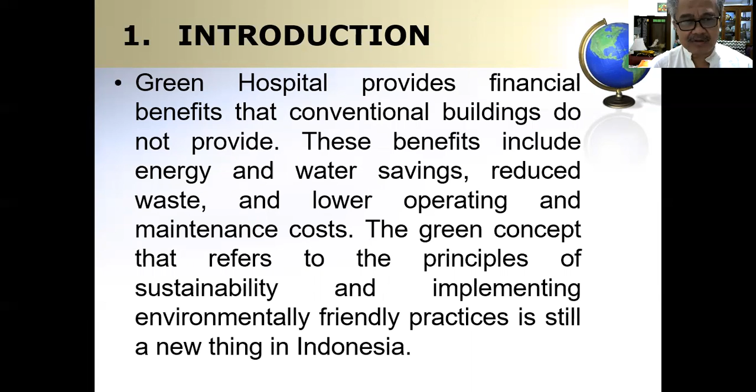The construction of the Bhayangkara Sartika Asih Hospital needs to be reviewed and evaluated so that it can be seen to what extent the green hospital has been implemented, especially in the aspects of location and landscape. The purpose of writing this article is to assess the implementation of green hospitals and provide technical recommendation for the Bhayangkara Sartika Asih Hospital.

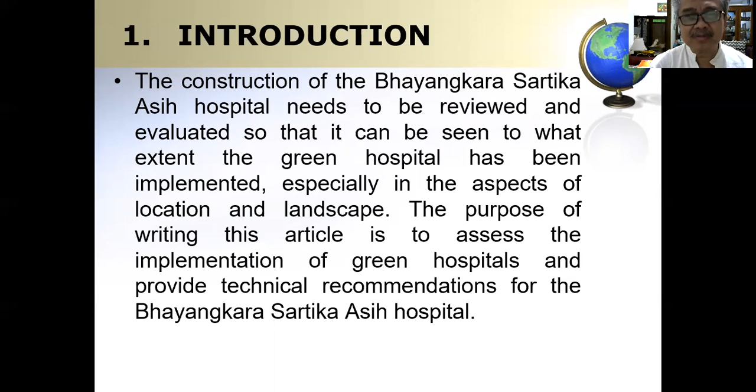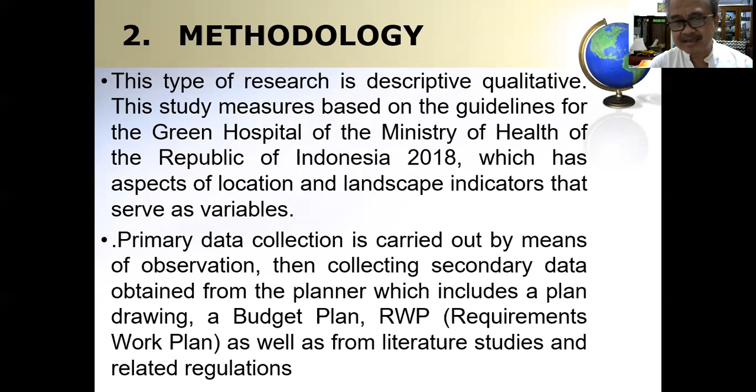Methodology. This type of research is descriptive qualitative. The study measures based on the guidelines for the green hospital of the Ministry of Health of the Republic of Indonesia 2018, which has aspect of location and landscape indicators that serve as variables. Primary data collection is carried out by means of observation, then collecting secondary data obtained from the planner, which includes a plan drawing, a budget plan, RWP, requirements work plan, as well as from literature studies and related regulations. The study area describes Bhayangkara Sartika Asih Hospital. Parameter, percentage of green hospital implementation on location and landscape indicators.

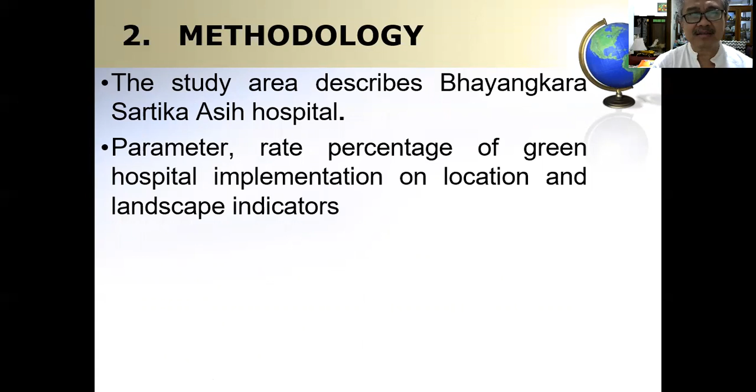Study area. The research location is located at Jalan Raya Muhammad Toha, number 369, Ciseureuh, Regol District, Bandung City, West Java, 40256.

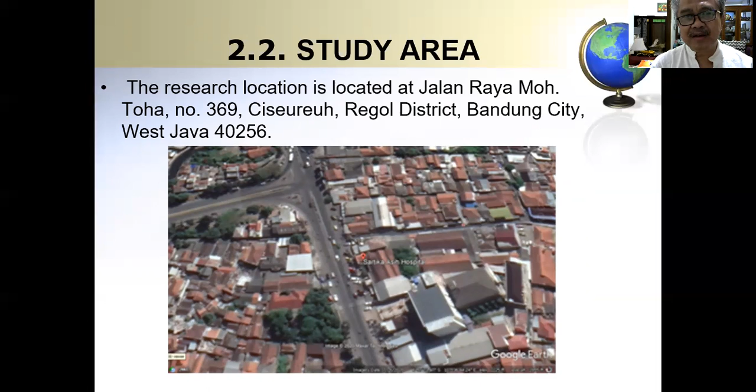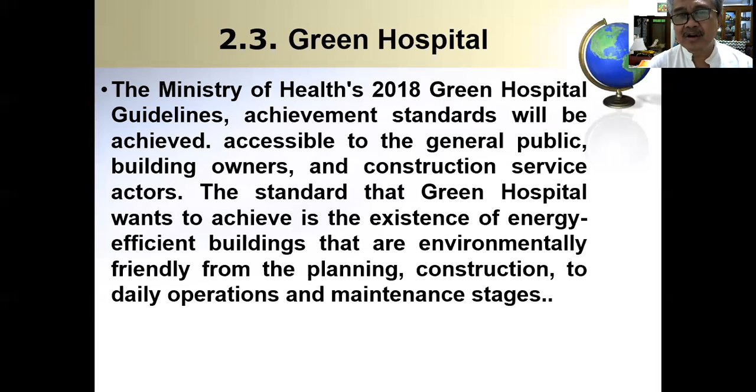2.3 Green Hospital. The Ministry of Health 2018 Green Hospital Guidelines achievement standards will be accessible to the general public, building owners, and construction service actors. The standard that Green Hospital wants to achieve is the existence of energy efficient buildings that are environmentally friendly from the planning, construction to daily operation and maintenance stages. Green Hospital of the Ministry of Health of the Republic of Indonesia 2018 has aspects of location and landscape indicators that serve as variables. Each existing category has criteria and benchmarks that serve as point assessment of the condition of the building.

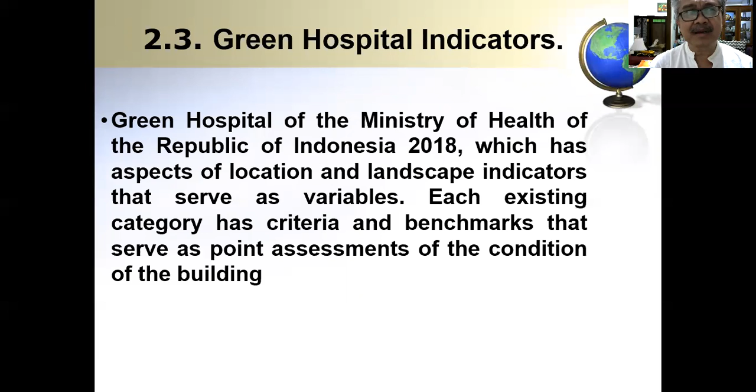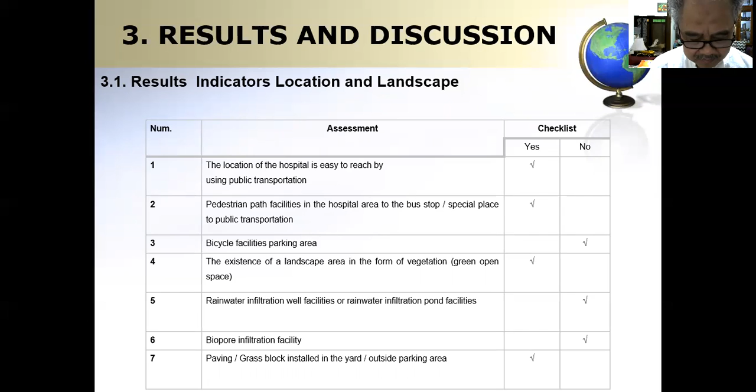In the checklist, yes. 5, rainwater infiltration well facilities or rainwater infiltration pond facilities. In the checklist, no. And 6, biopore infiltration facility. In the checklist, no. 7, paving or grass block installed in the yard or outside parking areas. In the checklist, yes. And the percentage of green hospital implementation on location and landscape indicators is total implementation indicators divided by green hospital indicators, 4 divided by 7 times 100%, and then we get 57.14%.

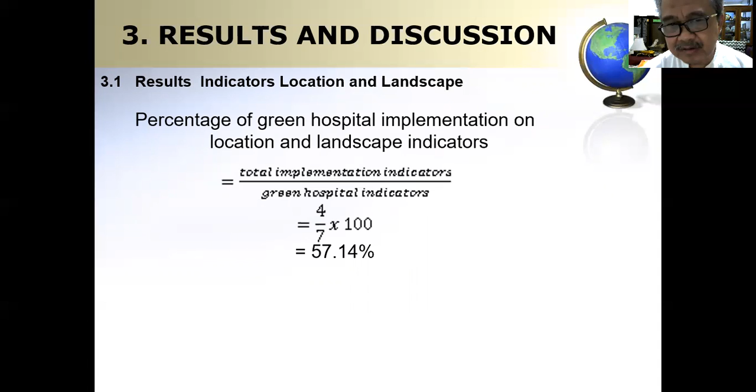And result indicators, location and landscape. Implementation of location and landscape indicators has 4 points with 7 requirements, namely: A, the location of the Bhayangkara Sartika Asih Hospital is easily accessible by using public transportation in Bandung. B, the green open space area is a garden in the front area of the new Sartika Asih Bhayangkara Hospital building and a vertical garden in the new building, while the wall garden is not yet available in the hospital area.

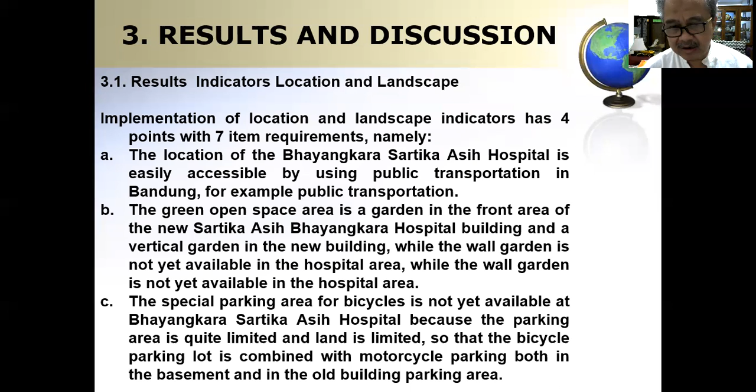C, the special parking area for bicycles is not yet available at Bhayangkara Sartika Asih Hospital because the parking area is quite limited and land is limited, so that the bicycle parking lot is combined with motorcycle parking both in the basement and in the old building parking area. D, pedestrian path facilities within the hospital area to the bus stop are not yet available. Hospital visitors who will go to the bus stop are on the same road as visitors who do not use public transportation.

And E, rainwater infiltration wells are not yet available in the area of Bhayangkara Sartika Asih Hospital because the existence of green open spaces is still wide, so that the water absorption is still good. And F, the biopore infiltration hole has not been found in the hospital area. And G, paving blocks are already in the courtyard area and the parking area for the new Bhayangkara Sartika Asih Hospital. Paving blocks are useful for avoiding stagnant water because they have high absorption capacity, thereby reducing the risk of flooding.

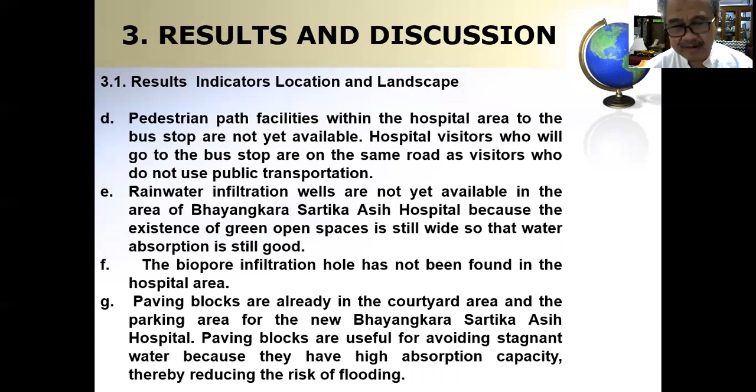Technical recommendation. Number 1, indicator wall garden. Recommendation: provision of a garden wall covering an area of 3 by 4 meters in 5 points. Second, special facility for bicycle parking area. There is a secure bicycle parking lot of 1 parking unit per 20 building users, up to a maximum of 100 bicycle parking units.

Third, pedestrian path facilities and provision of bus stops. Provision of a stop in front of the main door of the hospital building measuring 4 by 3 meters and a pedestrian path. Fourth, rainwater infiltration well: provision of rainwater absorption wells in accordance with the regulation of the Minister of Public Works.

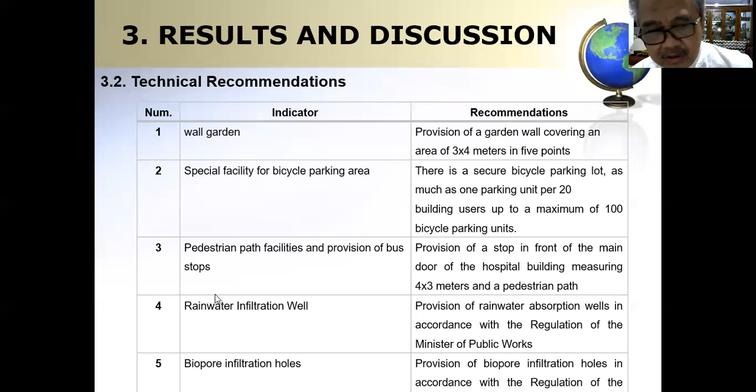And fifth, biopore infiltration holes. Recommendation: provision of biopore infiltration holes in accordance with the regulation of the... biopore infiltration holes. Result and discussion.

3.2 technical recommendation. Wall garden. A vertical garden is a garden that is designed and built vertically that can function as a space divider and cover the building walls. In general, vertical gardens can be divided into two types, namely green facades and living walls.

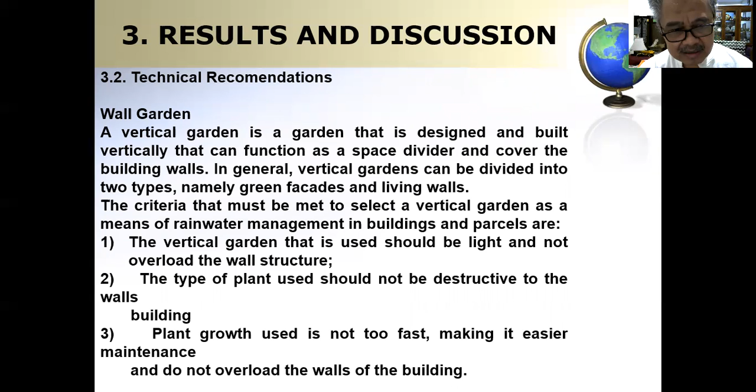The criteria that must be met to select a vertical garden as a means of rainwater management in buildings and parcels are: first, the vertical garden used should be light and not overload the wall structure. Second, the type of plant used should not be destructive to the building walls. Third, plant growth is not too fast, making maintenance easier and not overloading the walls of the buildings.

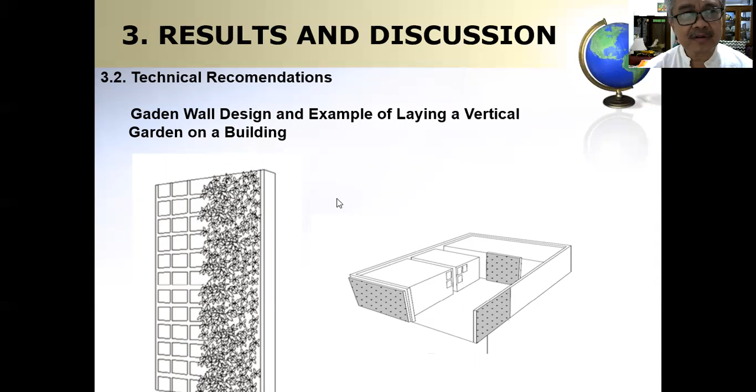And then the technical recommendation for the public stop: laying of the bus stop beside the entrance gates on Jalan Muhammad Toha as well. This can be added with the provision of a pedestrian pathway to the Bhayangkara Sartika Asih Hospital building. With the addition of bus stops and the existence of a pedestrian path, the points on the location and landscape indicators can increase.

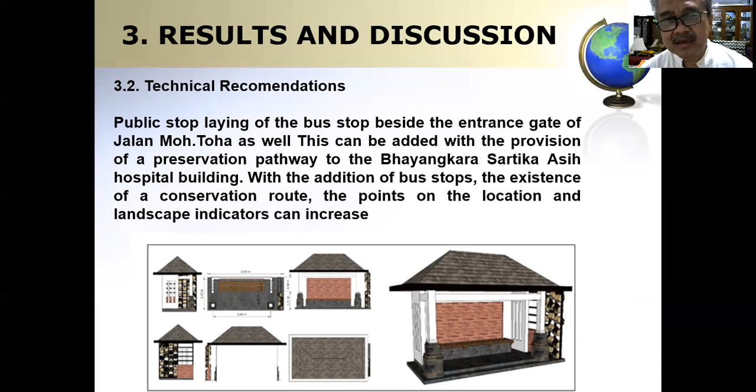And rainwater absorption wells facilities. The hospital should provide water retention facilities in the form of rainwater infiltration wells during the construction of the hospital building, with provisions from the Ministry of Public Works and Public Housing, so that during the rainy season floods do not occur and groundwater reserves increase.

The technical requirements for infiltration wells that must be met are as follows. First, depth of groundwater: the minimum groundwater depth is 1.50 meters during the rainy season. Second, soil permeability: the usable soil structure must have a soil permeability value bigger than 2.0 centimeters per hour. Third is distance to buildings: the distance of the placement of rainwater infiltration wells to the building.

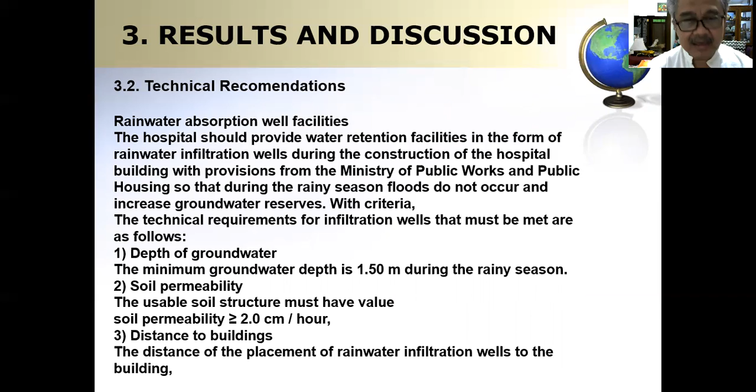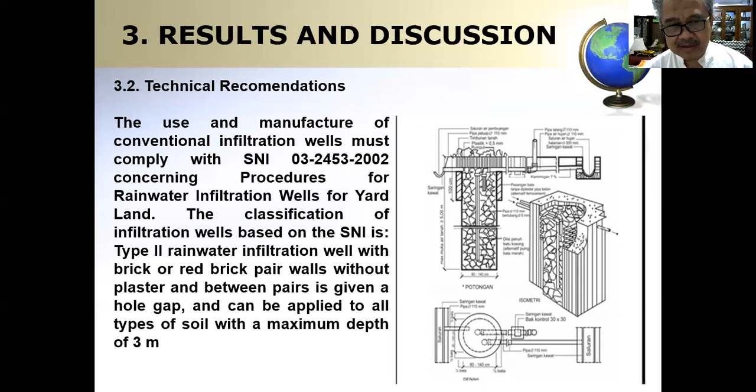And 3.2 is technical recommendation. The use and manufacture of conventional infiltration wells must comply with SNI 03-2453-2002 concerning procedures for rainwater infiltration wells for yard land. The classification of infiltration wells based on the SNI is type 2 rainwater infiltration well with brick or red brick pair walls without plaster, with a hole gap given between pairs, and can be applied to all types of soil with a maximum depth of 3 meters.

Biopore infiltration holes. The hospital should provide biopore infiltration holes during the construction of the hospital building to reduce rainwater runoff and increase water absorption in the ground, with the provisions of the Ministry of Public Works and Public Housing.

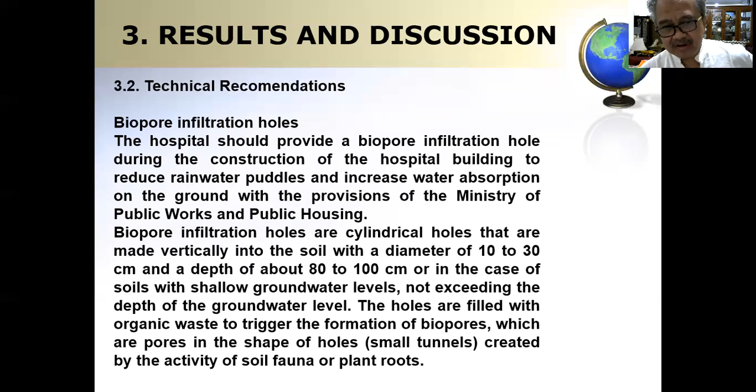Conclusions. The result of the assessment index on the location and landscape indicators aspect of the Green Hospital in the construction of the Bhayangkara Sartika Asih Hospital building obtained an index value of 57.14%. So the Bhayangkara Sartika Asih Hospital building has met several Green Hospital indicators in the location and landscape aspect.

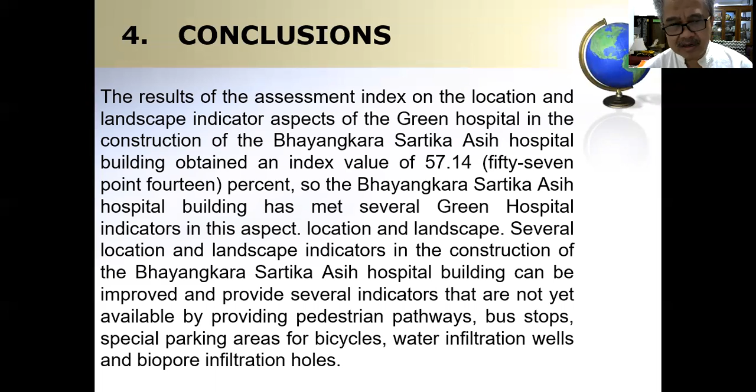Several location and landscape indicators in the construction of the Bhayangkara Sartika Asih Hospital building can be improved, providing indicators not yet available by providing pedestrian pathways, bus stops, special parking areas for bicycles, water infiltration wells, and biopore infiltration holes. It is necessary to make a program effort from the management of the Bhayangkara Sartika Asih Hospital in Bandung to improve the implementation of indicators for location and landscape aspects that are not in accordance with the 2018 Ministry of Health's Green Hospital Guidelines.